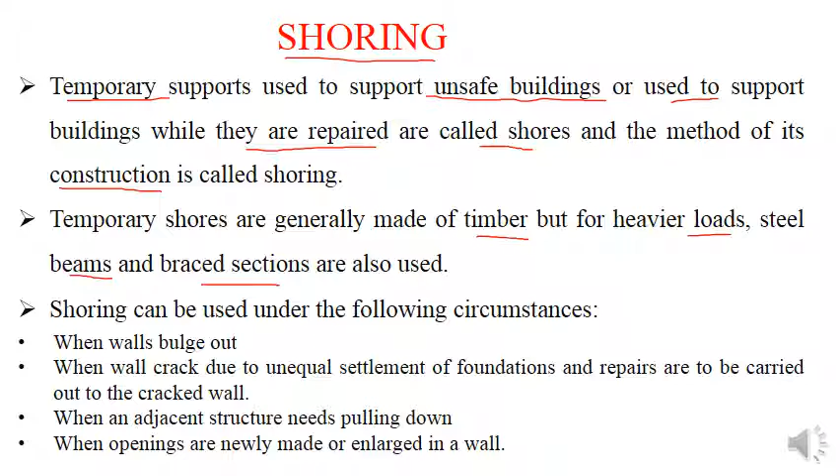Shoring can be used under the following circumstances: when walls bulge out, when walls crack due to unequal settlement of the foundations and repairs are to be carried out to the cracked wall, when an adjacent structure needs pulling down, and when openings are newly made or enlarged in a wall.

Another point you can add: when excavation is needed for foundations or for basements, we also need a certain temporary supporting system. There also we need support for the basements and for the foundations, so that we can support the soil for the basement and also for the foundation purpose.

You are excavating the soil, so the soil needs some support so that it does not come inside that particular opening, or similarly if openings are needed to be made within the wall.

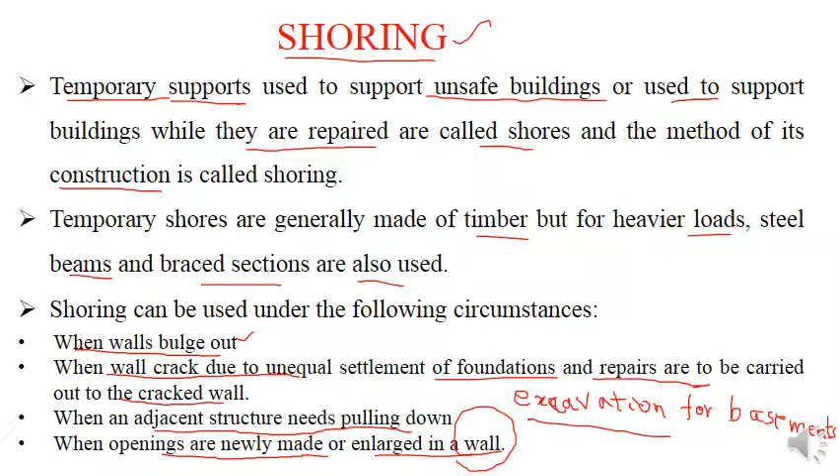Scaffolding is just to provide support for the masons and for materials at the construction site, for the construction of brickwork, masonry work, or any kind of concreting work. But for shoring, you are providing this temporary structure for repair and maintenance purposes.

Okay, so there may be any reason, but anyhow damage has occurred, meaning there is a cracked wall. To repair this cracked wall we need to support the rest of the building, and then we can start the repairing work.

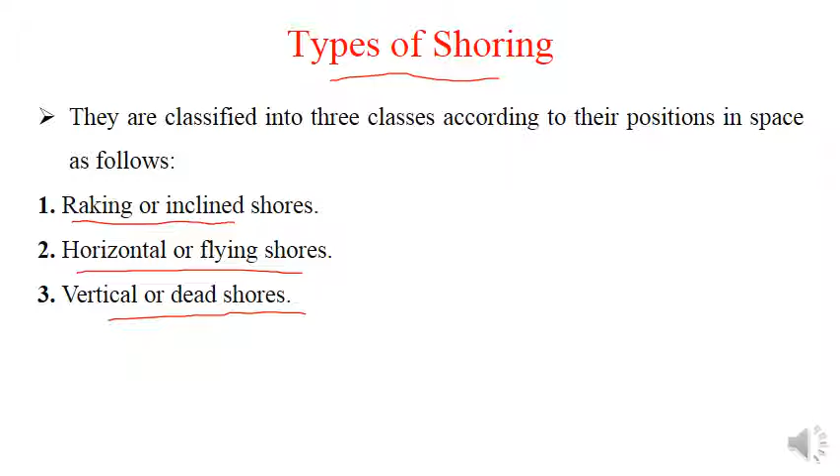First of all, we will discuss inclined shoring, also called racking. In this method, the inclined members, called rakers, are used to support the walls. This shoring consists of the following components: the inclined member or rakers, needles, cleats, braces, wall plates, and sole plates.

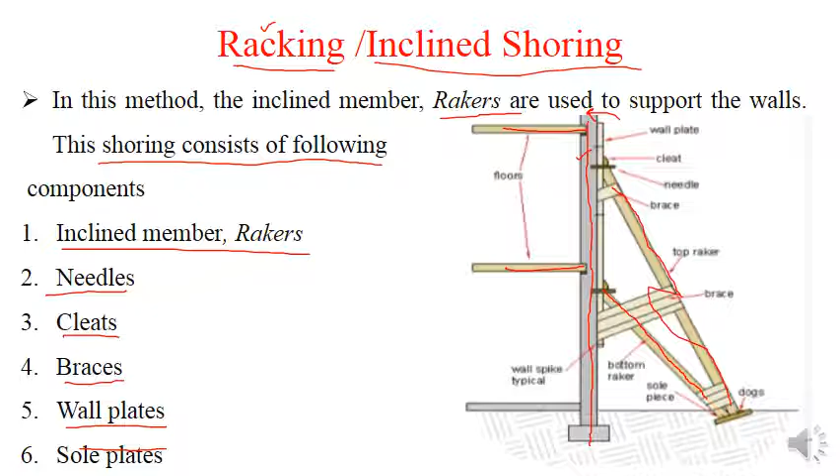So two kinds of connections, or supports, are needed. One is that these inclined members, or rakers, need to have a particular joint with the wall, and secondly with the base, with the foundation.

The system is properly jointed, and further you can provide the cleat to give additional support to the wall plate and raker connection. The cleat is kind of a nut, and the needle is kind of a bolt, like in steel where you provide threads on the bolt and a nut outside of it. By rotating the nut, you tighten up the screw. Similarly, the needle is inserted inside all these members, and the cleat acts as a nut to tighten up that particular connection.

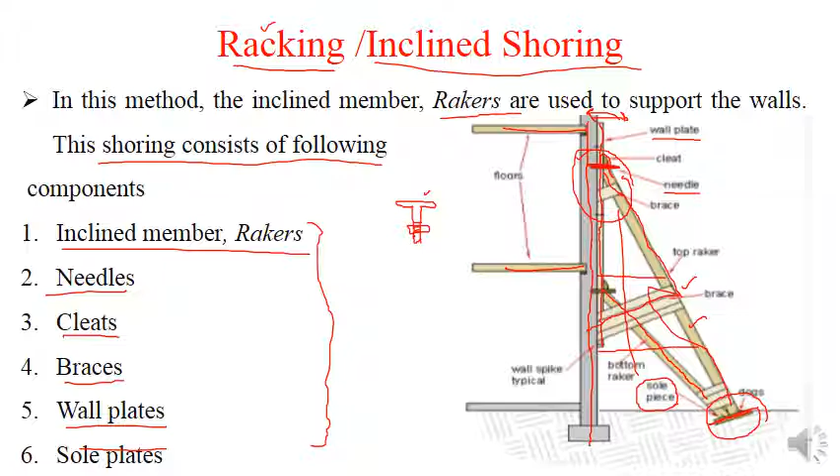For tall buildings, the length of the raker can be reduced by introducing a rider raker. Rakers should be properly braced at intervals. The size of the raker should be decided on the basis of anticipated thrust from the wall.

So we cannot specify the size of the rakers, because it depends upon the thrust coming from the wall—how much load you are supporting with the help of this particular raker. That dependency finalizes and gives you the final sizes of the rakers.

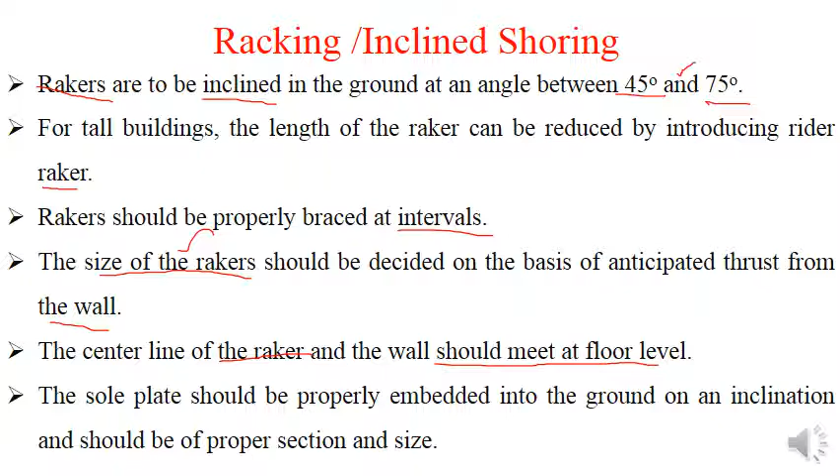The center line of the raker and the wall should meet at the floor level. The sole plate should be properly embedded into the ground on an inclination, with proper section and sizes, designed to provide a proper foundation for your rakers within the soil.

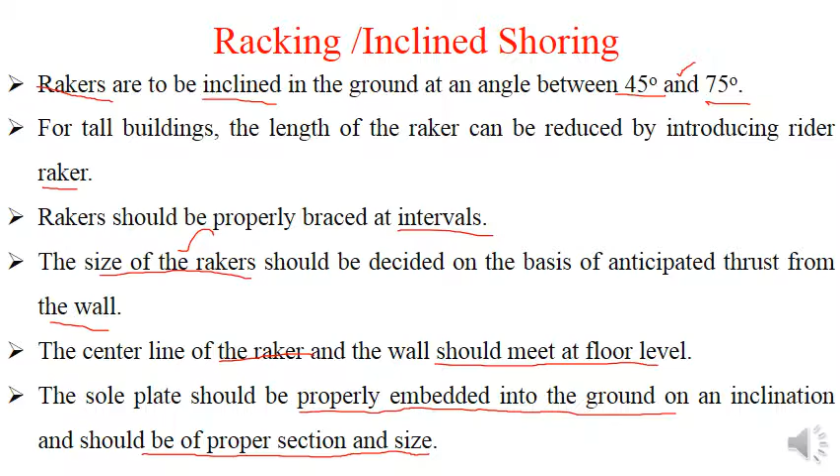Then comes flying or horizontal shoring. This shoring consists of a horizontal beam, horizontal strut, and inclined members called raking struts. So two kinds of struts are provided, which may be horizontal or raking. We will first discuss all the components, and then come to the figure to explain them.

The struts are fixed at one end to the wall plate with the help of needles and cleats. The other end of the struts is supported with the help of wedges and straining beams. This type of shoring is used for supporting walls of two adjacent buildings temporarily.

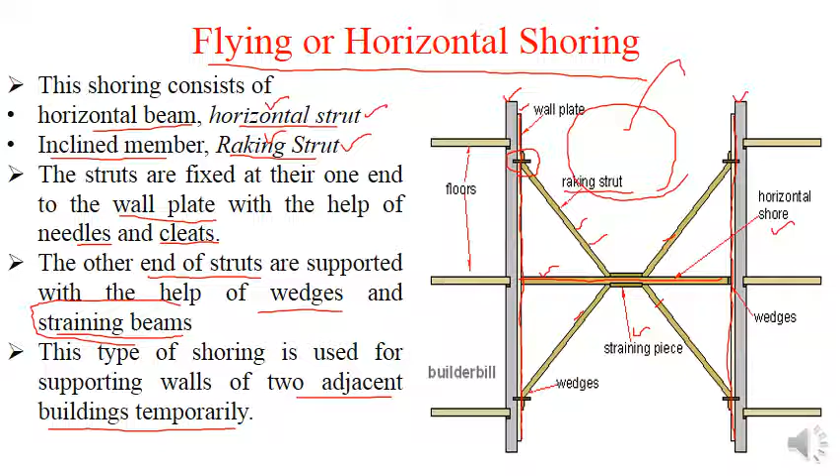We need a proper connection between all of these components. So to support the inclined member with the wall plate and the wall itself, we provide the same system of needle and cleats, like nut and bolt. And to support the horizontal member we provide a straining piece or straining beam, in inclined way.

I will show you this in 3 dimensions. The wall is continuous and connected with the wall plate, and in the 3 dimensional way you are providing at a certain interval another horizontal shore, with another straining beam. This beam is continuous, moving in the transverse direction, placed below and above this horizontal strut.

This type of shoring is used for supporting walls of 2 adjacent buildings temporarily. These 2 walls need to be supported relative to each other, and in between you provide a resistive supporting system to control the horizontal thrust of these walls, so it can hold the wall in place where it actually was.

So we do not disturb the other part of the structure, we just do work in this particular spacing. After the work is done, whatever the purpose of providing this shoring was, we can remove this temporary structure and move on.

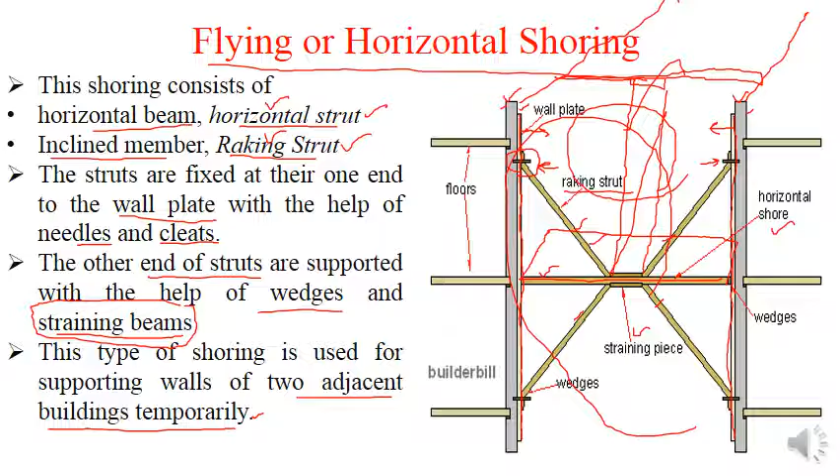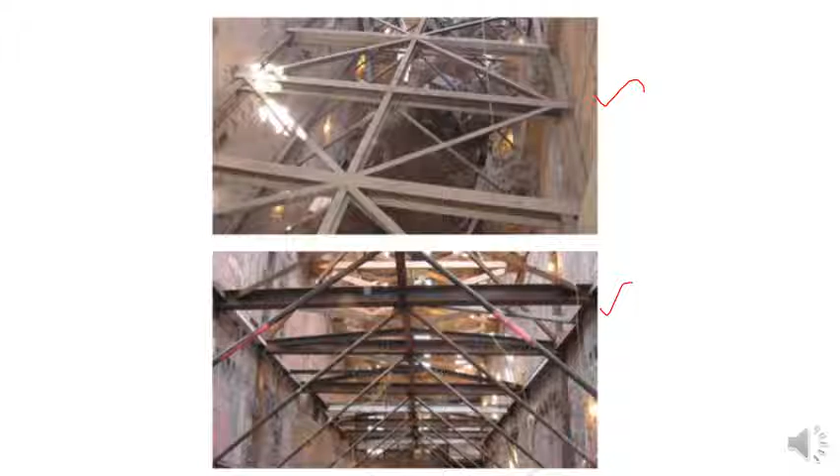Here in these figures you can see that these two walls need to be supported with each other. You can see the horizontal supports and inclined supports, with the help of a steel frame, provided in the form of shores.

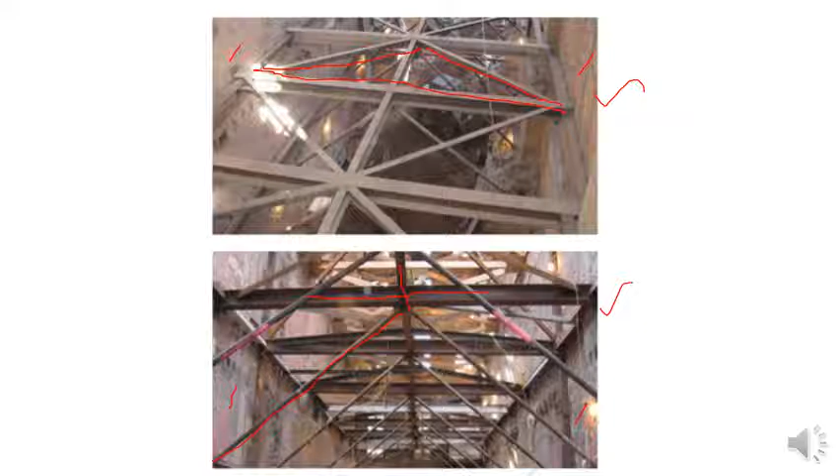So here also this wall and this wall need to be supported, and temporarily you are providing steel tubes and steel beams, and of course these are the straining beams in the lateral direction, connecting all of the horizontal struts. So inclined struts, raking struts and horizontal struts are provided, and finally you can provide this shoring as a whole in between these two walls.

Finally comes dead or vertical shoring. This shoring consists of vertical members placed outside the walls of the building undergoing alteration. Wherever the alteration, maintenance or repair needs to be done, if there is no space to provide a supporting system inside the building, then we need to provide the shoring outside of the wall, in terms of dead or vertical shoring.

These vertical members are called dead shores. They rest on a continuous horizontal piece called the sole piece. The horizontal members passing through the walls are called needles. Props are provided between the needles and the floors to support them. The dead shores and props are tightened by wedges. In the next slide I will show you these components in the figure.

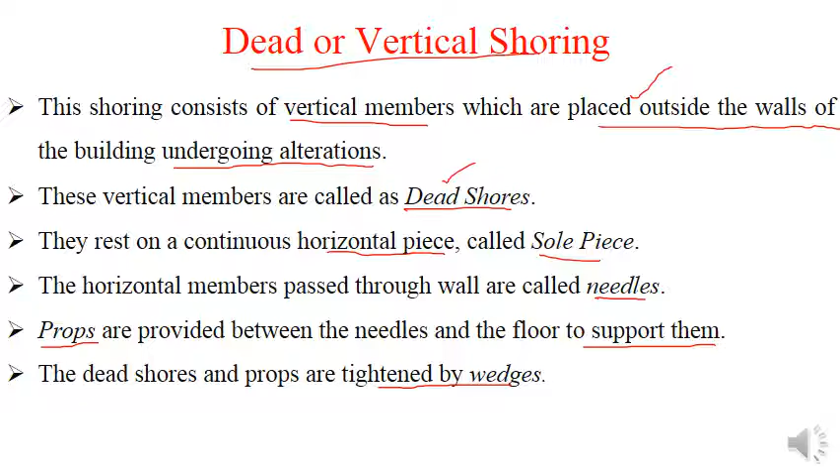First of all you have to remember the dead shore, the vertical members. Those are the main components for vertical shoring, and to support these dead shores we provide the horizontal sole piece and horizontal members passing through the walls, called needles. Props are again the vertical members, and finally the wedges. One by one we will see these in the figure in the coming slide.

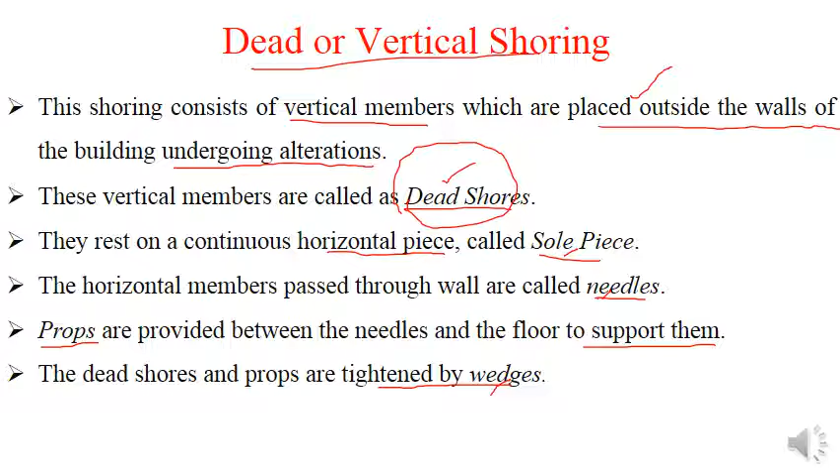So this is the particular wall that needs to be supported with the help of shoring. You can see that this is the main vertical shore, that is the dead shore. That is embedded within the soil with a proper supporting system, foundation system, and then that wall needs to be supported. So there should be a connection between the vertical component and the wall itself needed to support.

For that particular case we need a horizontal member that passes through the wall, and on the other side of the wall, outside, it is going to be again supported with the dead shores. On both sides you can see these are also vertical members, dead shores, and these are supported on the needles. The needle is the connecting member. So here also another dead shore, vertical shoring, and the props are provided. Those are again passed to the needles, providing a supporting system.

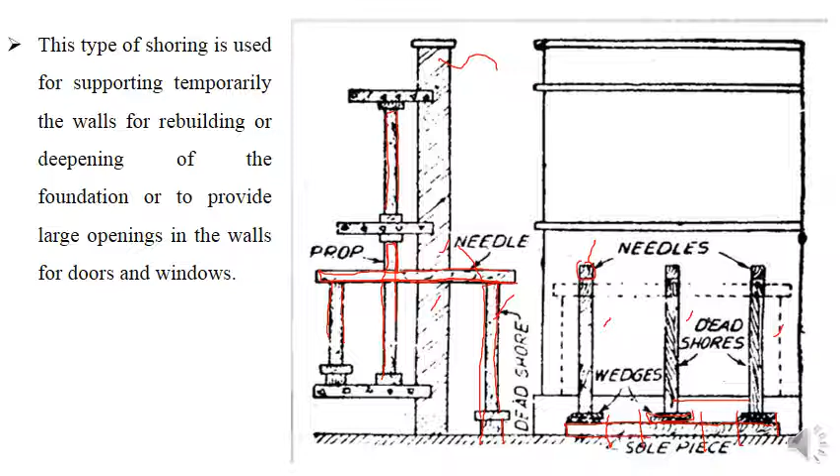And the sole plates, if in the other direction, the front side of the wall, then this dead shore in the inclined way, another dead shore, another dead shore. So on the front side of the wall you can see that 3 shores have been provided. Above, the needles are there in the inclined direction, in the transverse direction, and below, supporting the foundation system in terms of wedges or the sole piece or the sole plate is provided. That may be an isolated sole plate, meaning you provide for each dead shore separately, or if the spacing is less, you can provide it as a whole. Either way is okay.

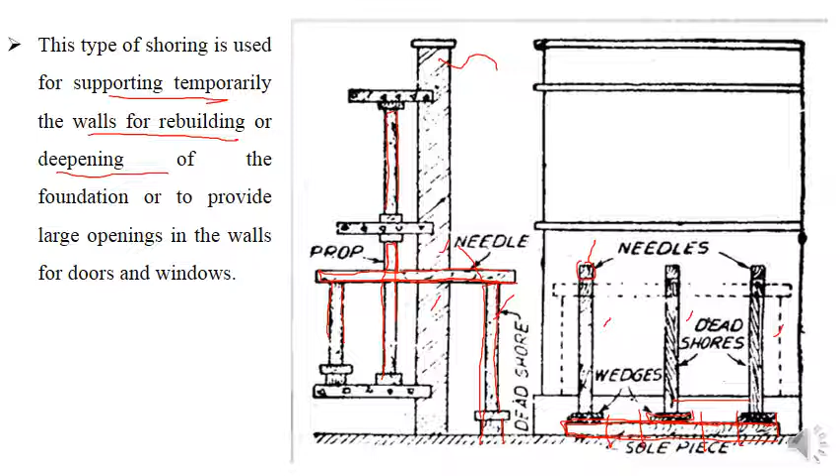This type of shoring is used for supporting temporarily the walls for rebuilding or deepening of the foundations, or to provide large openings in the wall for doors and windows.

Now that was it for the shoring part, and now we are going to start with the formwork or the shuttering. These two words are used, but still there is a difference between formwork or shuttering, which we will discuss later on.

The temporary support beneath and at the sides of precast or cast in situ concrete work is called the formwork or shuttering.

Requirements of a good formwork are: it should be strong enough to support the dead and live loads during construction. Number 2, construction should be such that it can be easily removed. Number 3, it must be so designed that it can be used several times. Number 4, it should be watertight as far as possible. Number 5, it should have plain surfaces so that they may provide good finished surfaces after removing the formwork or shuttering. So here the word 'or' is written, but there is a difference between formwork and shuttering.

You can mark a slash over here, formwork slash shuttering, you can also say that. So actually this whole assembly of the formwork or shuttering is provided at once, but there is a difference between formwork and shuttering. First of all we will discuss the definition, why we provide the formwork. Formwork is provided to support the concrete work.

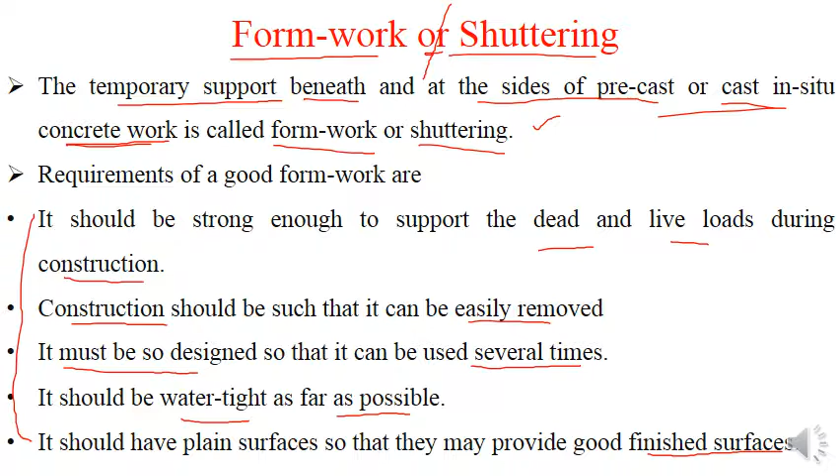Now, types of formwork. First, for the floors and for the beams. Generally for the floor and beams we cast the concrete at once, at one time, because the floors give you the beams, which are emerging from the roof slabs.

So what we can do is provide the molds, where this hatched part is all formwork - the initial mold, maybe of wood or steel, that gives you the particular shape of all the structural components. Here you can see the beam, a rectangular beam, and this is the slab. According to the designed thickness of the slab from the top, and the required depth of the beam, you are going to decide about your formwork, the sizes of the formwork.

Depending upon the concrete load, the main force of the concrete coming onto it, that load comes on the formwork, so you have to properly design your formwork - what should be the sizes, the thicknesses, the length, the width - whether steel plates or wooden planks are used.

So once this mold has been placed, the formwork needs a certain supporting system. If we start from the top side, you can see this is the whole concrete of the slab and this is the whole concrete of the beam. So these are mainly the forms, formwork - this is the beam formwork and this is the slab formwork. So you can label this as beam form, and this as the slab form.

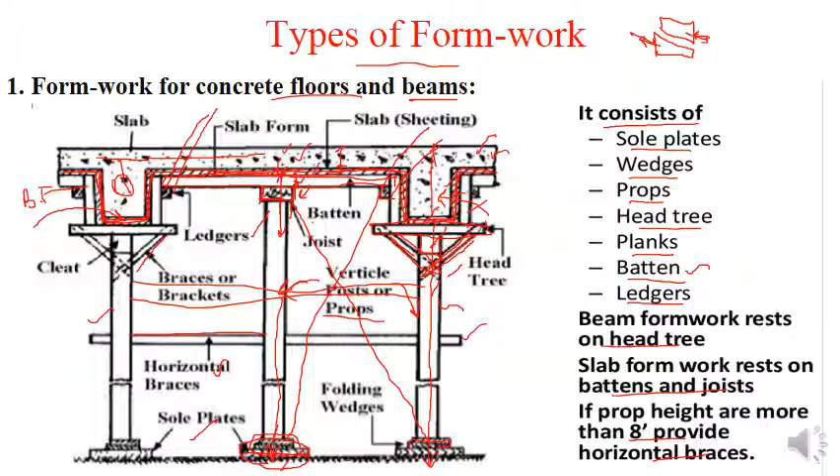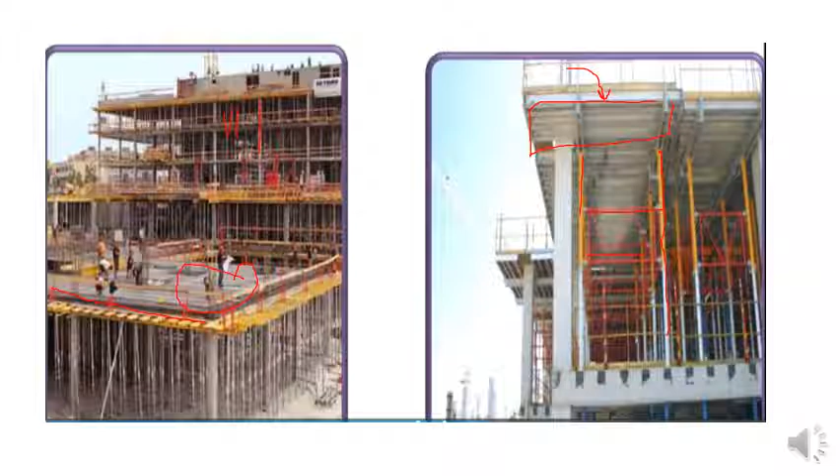So here you can see for the building formwork all of the vertical components, and you can see the formwork. In this figure it's also clear that first of all you provide the formwork, and all this greyish part is the concrete that has been poured to make the concrete slab. Similarly here you can see the steel shuttering - the vertical props and horizontal bracings you are providing, and this is the formwork. You can see these wooden or steel plates in terms of formwork, and above that formwork the concrete needs to be placed.

Then comes formwork for the concrete walls. It consists of the timber sheeting, vertical posts, horizontal members, rackers, stakes and wedges. You can see inside of this mold these vertical members.

This is called timber sheeting. Within these two sheets you need to pour the concrete to make the wall. Equal to the thickness of the wall, you maintain the distance in between these two sheets, and these sheets are further supported with the help of the vertical members.

Those are called the vertical post, the horizontal members, the inclined members or rackers, and below you are providing the supporting members in terms of wedges and stakes. These are embedded inside the ground to provide the support. So in this way the two sheets are provided, and in between them the concrete can be poured to cast the concrete walls.

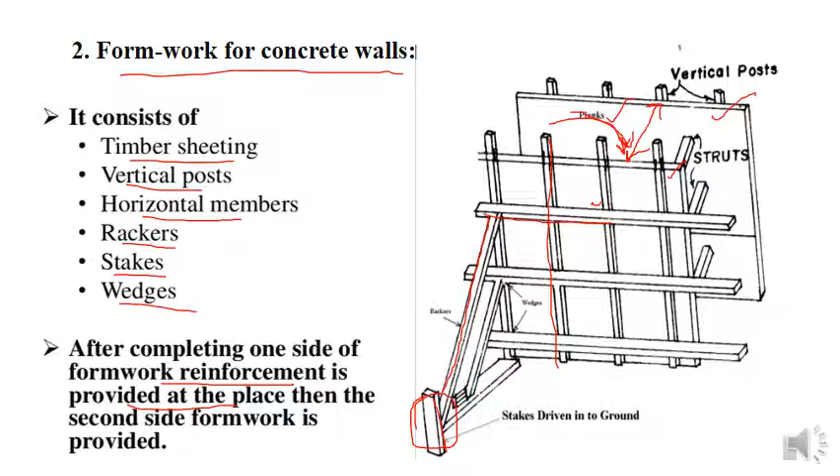After completing one side of the formwork, reinforcement is provided at the place, and then the second side of the formwork is completed.

This is the formwork for the concrete column. You can see again it is made of wood, all of it. Inside of this particular space you have to cast the concrete, you have to pour the concrete for the column, and before that you have to tie up all of the steel reinforcement.

If it is reinforced concrete, then you have to tie up the steel inside of it first, and then you have to pour the concrete.

To support this rectangular form, you are providing the side planks, the bolts, the yoke, and simple nuts to tighten up the bolts inside the yokes. So in this way, side and end planks, yoke, nut and bolts.

Two end and two side planks are also joined by the yokes and the bolts. On one side it's the yoke and the wooden piece, and these two wooden pieces are connected with each other with a large bolt.

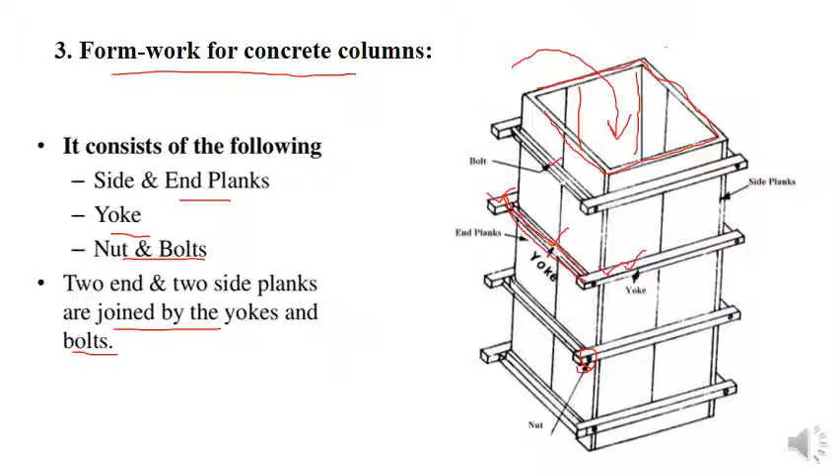Here the formwork has been shown for the rectangular column and for the circular column. This one is of steel, this is of wood, and this is of steel. You can see this is the yoke, the rectangular frame to support or tighten up the formwork, and these are the inclined rackers you can also provide to support your vertical formwork.

Here also it is the horizontal steel that is going to be tightened up, and then you can pour the concrete inside. Tie up the steel first of all, and then you can cast the concrete inside to make a column.

The last topic that we'll discuss today is the removal of the formwork. Time of formwork removal depends on the following factors. When to remove the formwork? It's very important.

It depends upon the type of cement. If rapid hardening cement is used, it requires lesser time as compared to normal concrete using ordinary Portland cement, OPC. So if the cement is rapid hardening, the formwork needs to be removed earlier as compared to OPC.